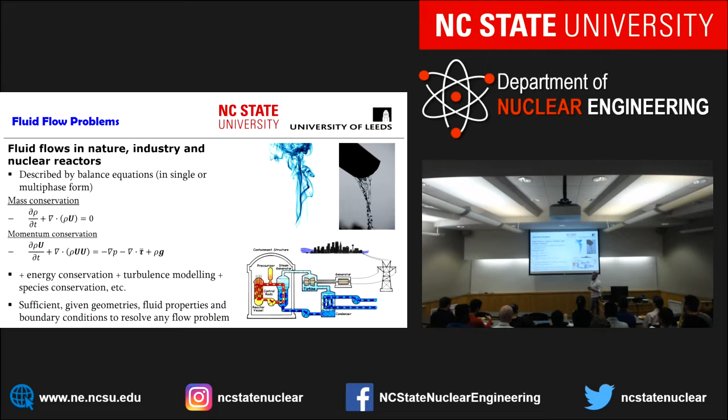That's why we use, many times and more now, computational fluid dynamics, which if we have to describe it in very few words is essentially a series of computer-based modeling techniques for the numerical solution of fluid flow problems.

Looking at all the software available now, more or less they have the same structure and go through the same steps. At the beginning you set up a geometry and build a computational grid on that geometry, as in this case here. Then the governing equations are discretized on that grid, so you pass from a system of partial differential equations to algebraic equations that can be solved.

That means the solution will be discrete, so it will be available only on specific points, and of course that immediately translates into the fact that the more computational grid you have, the more resolution you can have on your problem. Then you go through the solution of this system of algebraic equations.

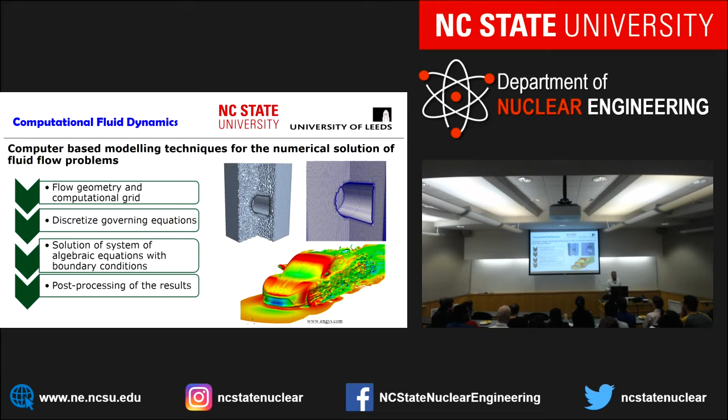That can be done with numerical techniques, applying the boundary conditions proper to your problem. And then when you have your results, you can do the nice post-processing that ends up in nice pictures like this one. So that's very, very briefly an introduction to CFD.

What I do is mainly focused on trying to apply CFD in different areas of nuclear reactor thermal hydraulics, or related to it, and use computational modeling to improve the capabilities we have to predict these conditions. In particular I'm focused on two areas.

One is boiling and the prediction of boiling heat transfer, and most importantly the critical heat flux, and trying to do that with models that are as physically based as possible.

Now, that was the original plan. Because starting doing that, I realized that then I spent most of my time trying to predict bubbly flows, which are only a portion of, let's say, the boiling problem—how the bubbles distribute in a flow, and how also the bubble population evolves.

And the other area is convection, and we developed a CFD model that we can use to model passive cooling with confidence, being able to estimate the passive cooling effectiveness. In particular, I've focused on external reactor vessel cooling strategies. These have been done in a series of projects supported by the EPSRC, the Engineering and Physical Sciences Research Council in the United Kingdom.

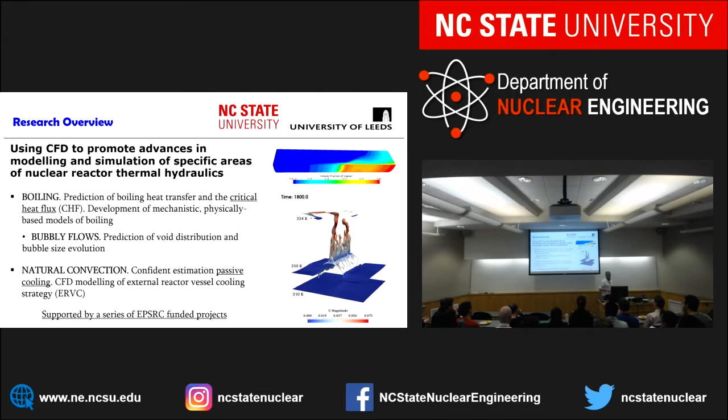So let's start with boiling. As you know, that's a very efficient, one of the most efficient heat transfer processes, and for this reason is widely used in nuclear reactors. We have boiling water reactors, but some degree of boiling always happens also in pressurized water reactors, and boiling is a fundamental part of many accident scenarios. It is very efficient, but at the same time is really, really complex. And what that means is that we still don't completely and fully understand how boiling works, and that means for sure that we don't have a model that is satisfactory to model the boiling process.

And that's not only for the boiling heat transfer, but also for the critical heat flux, which is even more important, because critical heat flux is the point at which, from being very efficient, boiling starts to become dangerous, because it's the point at which the amount of vapor generated at the surface is so much that the heat transfer happens mostly to vapor and not to water. Vapor has a much lower thermal conductivity. The heat transfer deteriorates a lot, and there are all the risks involved with damaging the heating surface, which in a nuclear reactor is quite critical for safety.

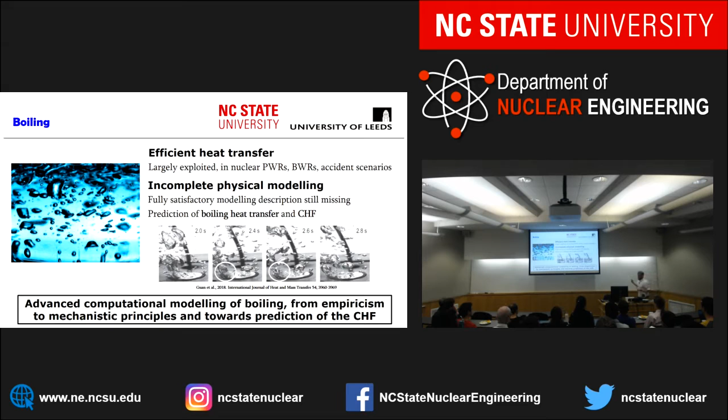...to look at boiling bubbly flows, which are only a part of the boiling process, because when bubbles are generated, it becomes a bubbly flow. And the first question was, can we model bubbly flows? And the answer was, well, we can do better. We can do better in that. And even without considering the exchange of heat, even only considering bubbly flows, an adiabatic bubbly flow without heat transfer, that's really a critical and quite complex flow.

They are not important only in boiling, they are important in many engineering sectors. In chemical engineering, we find a lot of application in bubble columns, such as this example here. And they have many complex sub-processes inside, so the transfer processes of mass, momentum, and energy that can happen at the interface, the turbulence that in multi-phase flows becomes different and has its own characteristics with respect to single phase, and also the fact that in a bubbly flow normally there are hundreds, thousands of bubbles with different shapes and sizes, and those shapes and sizes change with time and space.

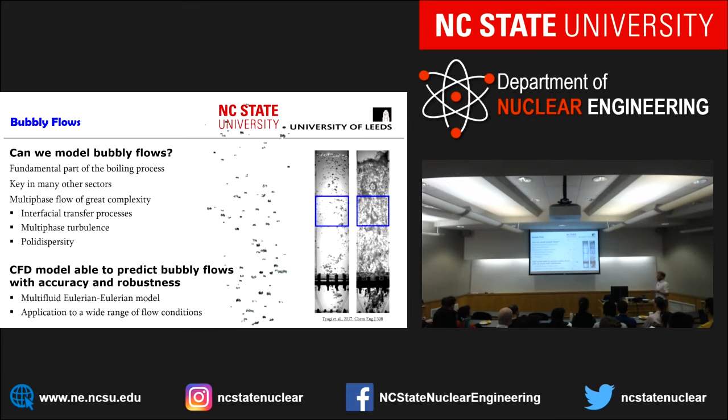Okay, so the model, as said, is multi-fluid Eulerian, so it's different with respect, for example, to interface resolving technique. So what happens is this: considering a bubbly flow, let's imagine that this is our computational grid. So we are solving in each one of these elements our system of equations. What we do is we average over every one of those elements. So what happens is the single bubbles disappear, and what we end up with is an amount of gas...

Once you have averaged those, you have gas and liquid at each point, and the relative amount is quantified by the volume fraction. This ends up in a model that is quite generally applicable and not really computationally expensive, so it can be applied quite easily even to complex flow conditions with a very high amount of bubbles, with reasonable computational power.

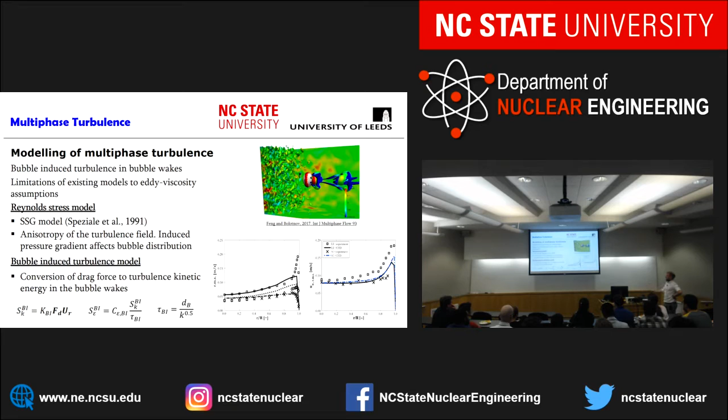And this is the time scales that I use, that from meeting this morning, I now know that I need to change. So already after half a day. And this is the last progress made.

So instead of using, we still have a Reynolds stress model, but now it uses the so-called elliptic blending approach. It's able to resolve also the region near the wall, allowing a very fine resolution of the velocity and the turbulence field near the wall. And that's quite important because it's a thing that is most of the time not taken into account in the models that are used.

So this is the radial turbulent stress across the radius of the pipe. You see that it has a gradient. And because of that gradient, you have also a radial pressure profile in your pipe or in your channel. That means that in single phase flow, that is not particularly important if you are in a channel or in a pipe. But in this case, you have bubbles, and bubbles tend to move to this region here where you have the minimum in pressure.

And for that reason, I really think that is an effect. It's not the only effect that moves bubbles radially to obtain this profile, but that is a thing that needs to be taken into account to have models that are as general as possible.

And in fact, I mentioned the wall force before because that wall force was introduced to obtain this profile, but it's a bit uncertain. There are people questioning the validity of, or the existence of, that wall force.

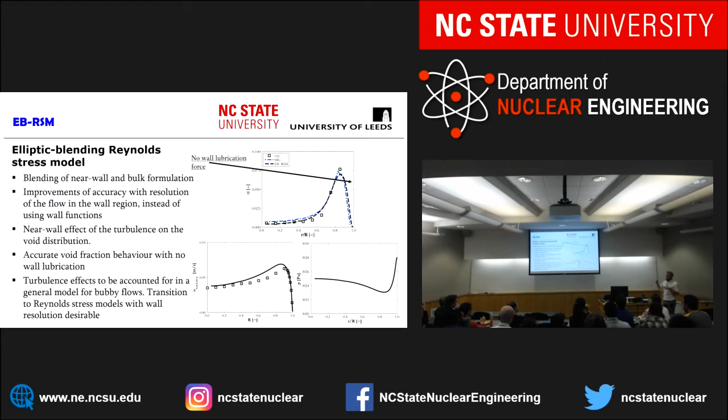And when we use a model that resolves the wall region, we are able to resolve all this pressure profile as well. And these profiles were obtained without any wall force. And if we are able to do that, we can take away all the uncertainty related to the use of that wall force. So in my opinion, it's a more general model, and we should try to move to models that are Reynolds stress models and also resolve the near wall region for future development.

And I think this is the last slide on this area, and then I will move to talk about polydispersity. That model has been benchmarked with the same model developed at HZDR, and I want to specifically mention this benchmark because there is an idea behind it, and is what they called their baseline approach.

So I've talked a lot about all these models. Also, you've seen all these closures, and drag, lift, wall force, exists, does not exist, turbulence model. In any of those models, there is some uncertainty. And that means that if we try to optimize on a single experiment, we might end up with a model that is perfect for that experiment and doesn't work anymore when we change the flow.

So what we were trying to do is select some closures, keep them fixed, and do not change them unless we see improvement over a very wide range of flow conditions. And that was the idea of that benchmark.

Applied our model without any change. And in the end, we saw that they were quite robust, quite accurate. We selected a series of flow conditions, and between the two groups, we have really compared against a wide number of flows, and they provide quite good accuracy, in particular on the void distribution. It's not perfect, but the errors are not large, and they can predict those flows quite well.

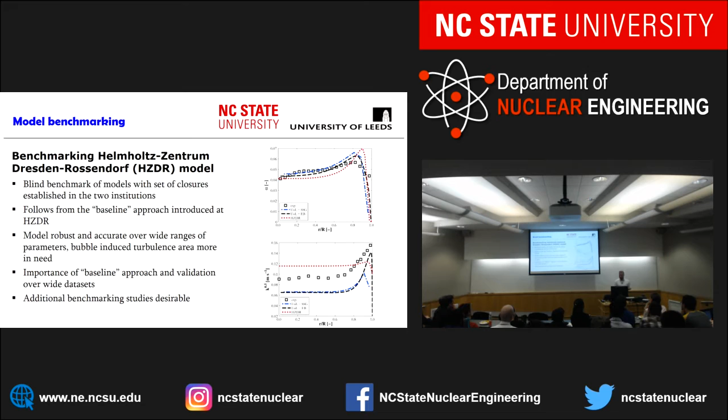Now I would like to move to another area, because we have talked about the interfacial closures and the turbulence, but we have not said anything about the bubble itself.

What happens is we don't have bubbles that are all the same type. When we have a lot of bubbles in a flow, they are all different. They have different shape, they have different size. And depending on shape and size, we have a different amount of interfacial area. That's a key parameter, because all the transfer between the phases - mass, energy, momentum - happens on that interface. So the amount of that interface is critical to be able to predict these transfers.

We have lost the knowledge of the bubble shape because of the averaging, and we need another way to quantify the interfacial area. In particular, if bubbles are a lot different in the flow, and they can change their shape and size for multiple mechanisms.

They can coalesce because of the turbulent motion. They can collide and coalesce into a larger bubble. Because of the same turbulent stresses on their surface, they can break up into smaller bubbles. This is still coalescence, but due to wake entrainment - the bubble traveling behind the first one tends to go faster because it's traveling in the wake and can coalesce with the first bubble, again generating a larger bubble.

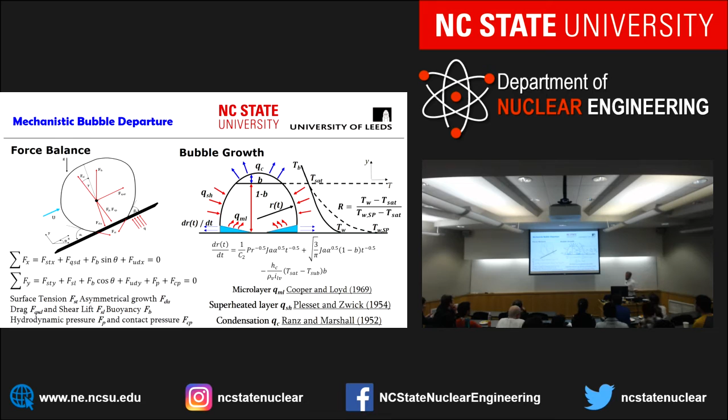And that is essentially, in a few words, the basis of the more mechanistic model for boiling. That has been tested again against databases of saturated and subcooled boiling, and I want to talk a bit more about this case, which is quite complex, because here there is a horizontal rod bundle with a cross flow, and measurements were taken on a single tube, with different configurations analyzed.

So with the heat only on that tube, and with the heat on different tubes as well. In all those conditions, even though it's quite difficult to predict because you have different temperature fields in the different setups, which affect the evaporation and growth of bubbles on that specific rod, the model was still in quite good agreement with the experimental data, keeping in mind that in this area, good agreement means 30 to 50 percent. If it's below 30 percent, that's probably quite good agreement.

And in the plot you see the departure diameter as a function of the wall temperature, and here instead for two cases, the departure diameter calculated by the model versus the one in the experiment. So you see that most of the data are inside those error bounds, which I think are plus or minus 30 in one case and plus or minus 50 in the other. But again, there is a lot of uncertainty involved because of the measurement of this process.

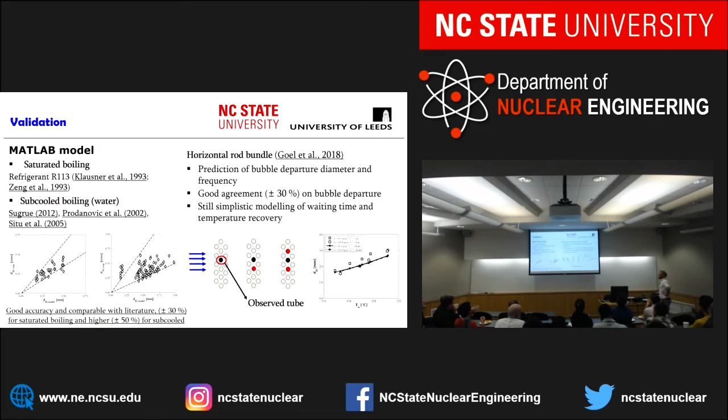And then the last part — I forgot to mention this model was developed outside the CFD code. It's a MATLAB model that runs standalone. The last part was implementing this mechanistic model inside the CFD, which has been done.

And you see an example here, the same void fraction profile for another case, but it's up and running. It works, produces good results, as you see here — this is the wall temperature along a pipe, and the model has also been compared against other available data.

And it's used not only to evaluate the bubble departure, but also to evaluate another parameter, which was the frequency, because since we know the growth of the bubble and the time it takes to grow, we can also calculate the frequency of departure from the heated surface.

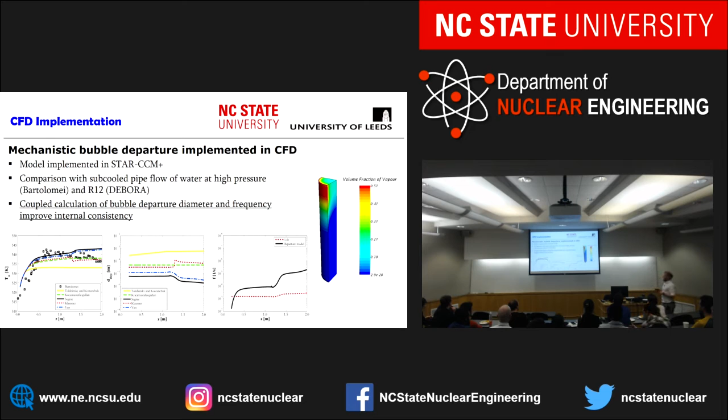And other than that, at the university we are trying to develop different techniques. For example, we have a PhD student working on an interface resolving method instead. In this case, the bubble is fully resolved. But I don't have to spend a lot of time talking about this method, probably because there is much more expertise here.

So we have cases of bubbles in a turbulent flow, as in this case, a single bubble in a turbulent flow, and also multiple bubbles.

The main idea here is that for the other model, the multi-fluid model, the closures are really important, and there is a lot of uncertainty in those closures because, similarly to boiling, they were developed from experiments — some really old. What these simulations are capable of doing is making available knowledge that is difficult to gain even in the most advanced experiment. They really are able to provide details of the flow that are fundamental to developing better closures for the more macroscopic model.

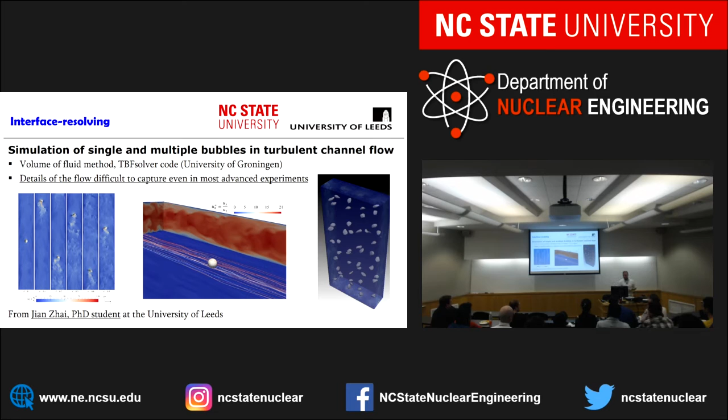But this is an activity only just started with this PhD student, and hopefully we'll develop more in the next few years. Instead, I want to spend a few minutes talking about the most recent activity I've been involved in, what I'm spending time on, let's say.

So I've talked about bubbly flows, but of course when boiling occurs, or in other situations, it's actually difficult to find a real situation where you have only a bubbly flow. Most of the time you have a transition between different flow regimes. So you can have bubbles, you can have larger slugs. In a boiling channel, you start with bubbles, then develop a slug flow, then develop an annular flow with a film of liquid and droplets of liquid inside the gas. So you go through all these different flow regimes.

And in any of those, the closure required by the multi-fluid model will be different. That's a big challenge, because the multi-fluid model doesn't really work well when you have very large segregated interfaces — it works well here, but not there. And a model that works really well there is the interface resolving model.

Of course, the interface resolving model works well also here, but you need a lot of computational power to be able to resolve all the details of all the bubbles. So the idea here is to try to include some kind of interface resolution-like capabilities inside the multi-fluid model, so that we are able to...

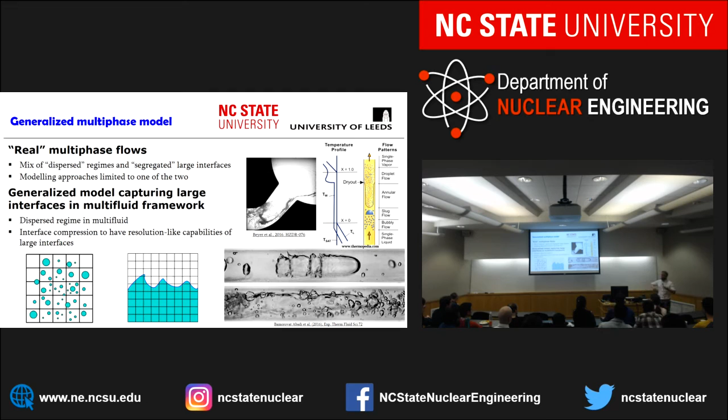So we have tested that for very fundamental cases, but you see here a simple rising bubble, rising in water. And this is how the model works. You see that red area there, that is the area where this large interface is detected. The compression is activated only there in that area, and the model is able to maintain...

...the interface sharp. Keep in mind that we still have two equations, we have two velocities, not one, as it happens in the interface resolving model. And other than the interface compression, what the model does is activate surface tension in that region, and also change the drag model from a bubble-based model to a model that is more proper for this kind of interface.

And you see the results here. The black line is the generalized model, and the others are some DNS simulations using volume of fluid. And the results are in quite good agreement.

At the same time, the model is still able to predict a pipe flow where the flow stays dispersed, the compression does not activate, and we have the same void distribution that we have seen in the previous cases.

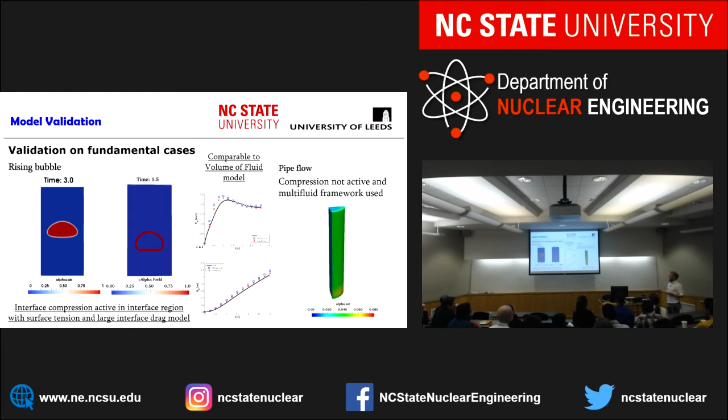So this is more or less the research in this area of multi-phase bubbly flows and boiling, and the recent developments. Now I want to spend the last part of the presentation to talk about another application that we did, which was, as I mentioned at the beginning, the use of CFD to evaluate passive cooling.

There is a lot of attention now on the introduction of passive cooling systems in reactors. Some have already operated. So we think that we also need computational models that are able to predict passive cooling and natural circulation flows with accuracy, so that we provide a tool that is able to evaluate passive cooling effectiveness with confidence.

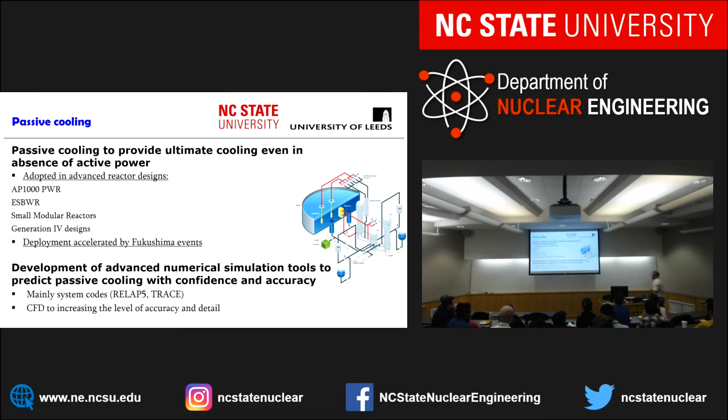And the passive cooling system we have focused on is the external reactor vessel cooling, which in case of an accident that involves the melting of the core is kept inside the reactor vessel, and the vessel is cooled by natural circulation on the outside, and we expect boiling to happen there, which means our limit becomes the critical heat flux. It's very complex because we have all the complexities of natural convection plus the boiling.

So we wanted to test the capability of CFD to predict this flow, the boiling condition, and the natural circulation as well. And this is the geometry we modeled, because this was an experiment done by collaborators in India. It's the vessel of a pressurized heavy water reactor, and they used melted glass inside the vessel, and the vessel was in a pool of water, and they allowed the vessel to cool for some hours.

And the good thing is that they have measurements for many hours. And you see here the data available. This is the heat flux at different locations across the vessel wall. And we used that as a boundary condition in our CFD model.

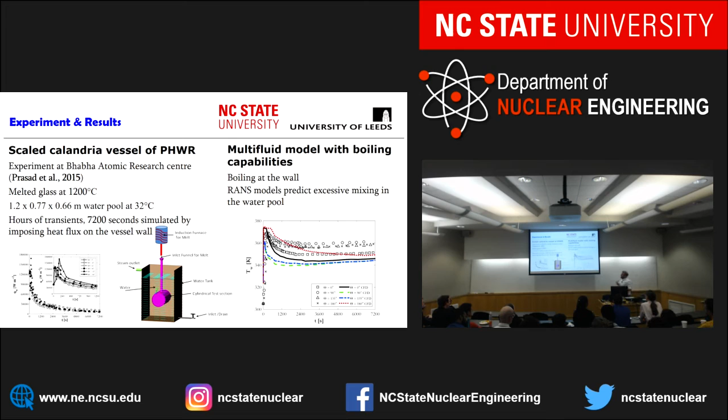Since the temperature of the water is lower here in the simulation, the wall temperature also becomes lower. So I moved to a different turbulence model and tried to use large eddy simulation to predict that flow, using OpenFOAM. You see here the vessel temperatures predicted by the large eddy simulation are much closer to the experiment.

This is the thermal stratification in the pool. The symbols are measurements taken at different heights, from the bottom of the pool to the top. You see that the bottom of the pool basically doesn't do anything, it just stays more or less at the initial temperature. Instead the top heats up, and using large eddy simulation, the model was able to predict this process.

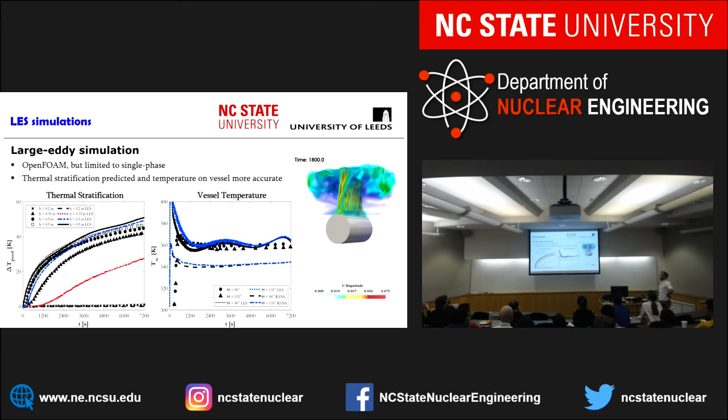But this was only done in single phase, so there was no boiling model and no two-phase model in this simulation. There are some nice videos that can be shown for this case.

This is the velocity. You see the buoyant flow at the top of the vessel, because the water is up here and recirculated there. And the temperature field develops, heating up more and more in the upper part, but staying more or less at the same temperature at the bottom.

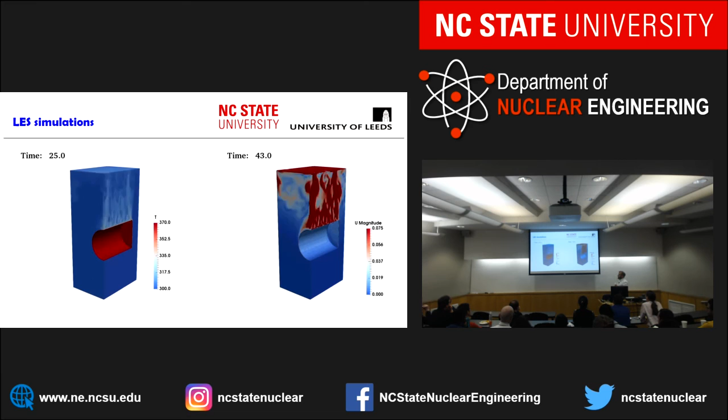So the last slide, which is not really a conclusion, is more about future development. I've tried to talk a bit about the different models, and the idea is to continue this development, keeping this multi-scale approach: a multi-fluid model to predict large macro scale, industrial scale multi-phase flows, with continuous improvement of the closures to make the model robust, and validation of this model with databases as wide as possible.

But at the same time, coupling with and using interface-resolving techniques to better understand the smallest details, the smallest physics of these flows, and generate understanding that can be used to improve the macroscopic closures.

At the same time, apply these models to much more complex conditions with the continuous development of computational resources, and try to put these together in what I call the generalized multi-fluid model, to reach applicability across the different flow regimes, and ideally being able to selectively resolve specific regions of the flow where resolving all the details is more important than in other regions.

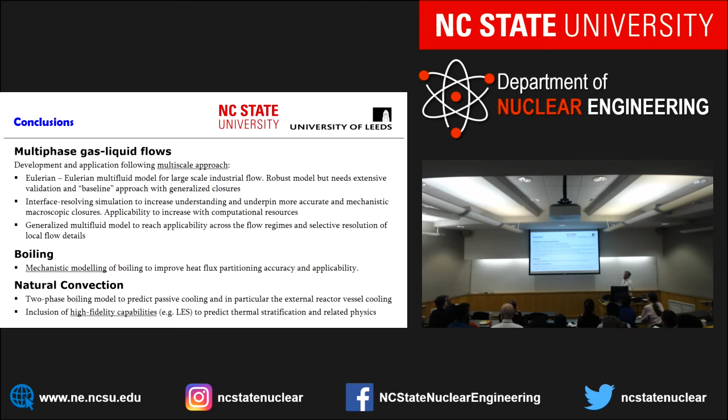So this is not my field, but when you're talking about the little bubbles migrating to the side, the way I understood it in my head is that they effectively have a higher viscosity, and so they just migrate to where the flow is lower.

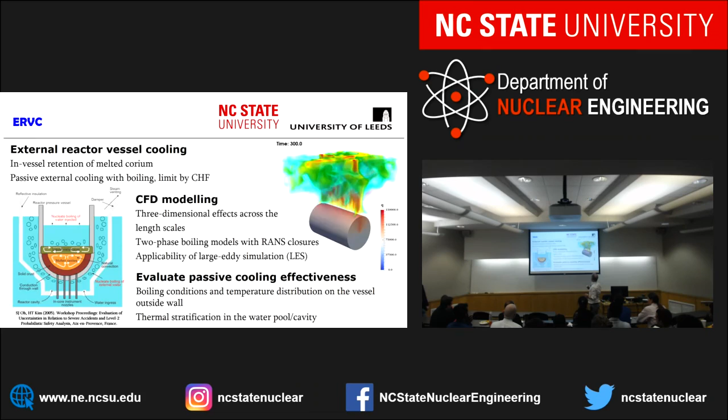The little bubbles go to the side because there is a shear flow, so the velocity is lower at the wall. But the bubble moves more or less at the same velocity, so the velocity of the fluid around the bubble becomes different on the two sides, which tends to push the bubble. The pressure distribution becomes different on the two sides of the bubble, and tends to push the bubble towards the wall.

Because of the lift force, right? Yes, it's a lift force, because the relative velocity between the fluid and the bubble is higher on one side than on the other.

So I really liked your generalized multi-phase model. It's kind of like the interfacial equivalent of LES almost. But I was wondering, is it kind of a step closer to a two-fluid four-field model, or how is it different?

It's not really a four field because it keeps the same two field, being able to handle the entire transition from bubble dispersed in a liquid to droplet dispersed in a gas will be quite tough. But the difference is that the switching is not activated based on general flow regime maps. It's activated locally based on the gradient, for example, of the void fraction, or can be activated also based on the population balance result. So in that way, I believe it's different with what there is available.

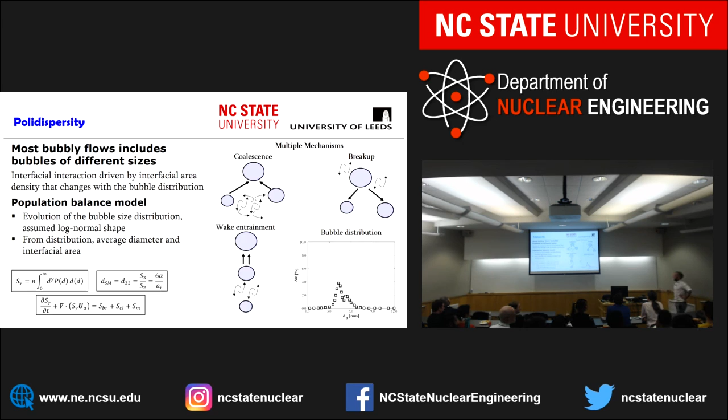And what distribution do you assume for such an experimental distribution? So what is the equivalent distribution that you use within the model itself? Okay, in the model we use a population balance with two different groups of bubbles that interact with each other. So we start with all bubbles of this size, of the left peak, and when they coalesce and become bigger than a certain size, they transfer to the second group, and the second group instead moves to the center with different values of the closures. That's why you can't do that with a single value of the average bubble diameter. There are other methods, for example you can divide these into a lot of classes, but still you have to account for the different behavior of the two groups to predict that.

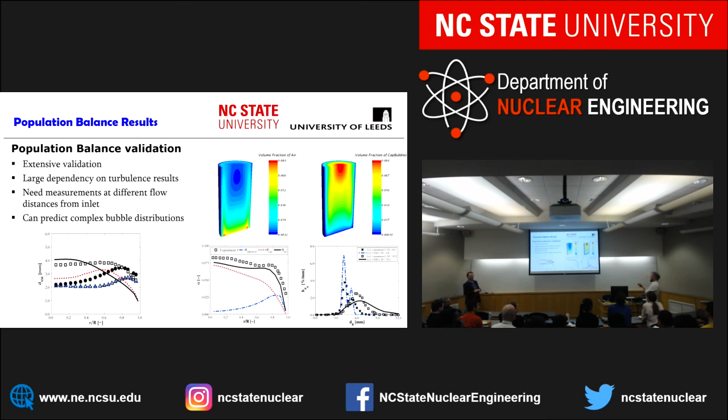Does the surface condition affect bubble departure diameter? Yes. And does your model account for it? No, not really. The surface, you mean the surface characteristics? They are kind of included in this active nucleation site parameter. That's probably the most uncertain thing there is in boiling, I believe it's really difficult to properly account for the specific characteristics of the surface. Can the user specify somehow the properties of this surface using this model? Yes, in the sense that you still have to specify the active nucleation site, the number of nucleation sites active on that surface, then you can specify whatever values you want. So in that way, yes. But if you mean specifying the details of the surface and their effect, not at this point, because it goes to a scale that is really small. There are correlations that try to account for that, but they are material specific, and it's quite tough to be accurate on that.

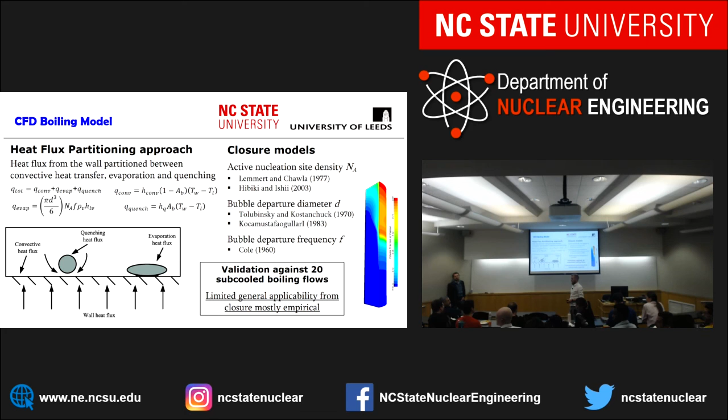Well, they are closures that have been developed based on experiments on bubbly flows, so they are more or less accurate on bubbly flows. Of course, when your flow changes, these closures need also to change, and that is the tough part, to apply this model as it is to flows that change regimes. There has been a lot of work done on bubbly flows for this closure, so as long as we stay on the bubbly flow, they behave in a reasonably good way. Outside, much less, as long as we consider up to 50%. Well, that's multi-phase flow, so we are allowed to do that. And of course, by testing them quite extensively over different flow conditions.